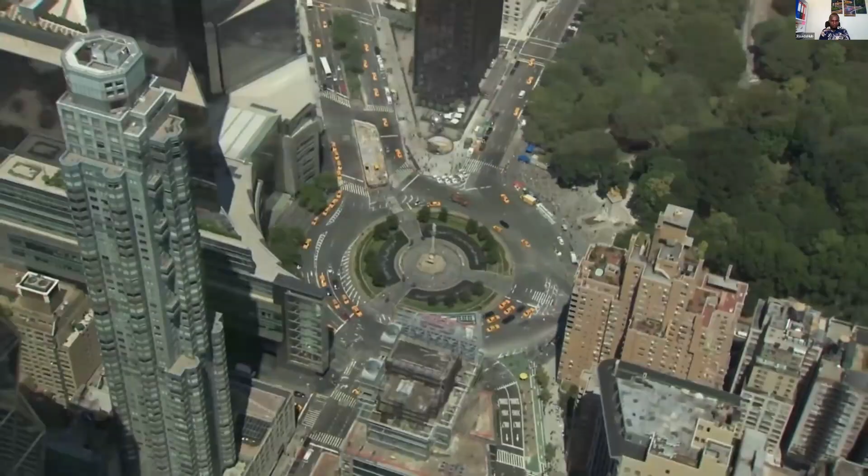Cities, those dense congregations of people and buildings, have made possible economies and lifestyles our early ancestors could never have imagined. Whether you thrive in or despise the concrete jungle, there's no denying its benefits. Putting all the people, houses, jobs, stores, offices, and diversions in one place gives us opportunities that wouldn't be possible if we all lived agrarian lifestyles spread across the countryside. But there are negative consequences from cramming so much into such a small area, most clear when it rains. Managing the flow of runoff through a city is an immensely complex challenge affecting public safety, property rights, the environment, and the health and welfare of citizens.

Hey, I'm Grady, and this is Practical Engineering. On today's episode, we're talking about urban stormwater management.

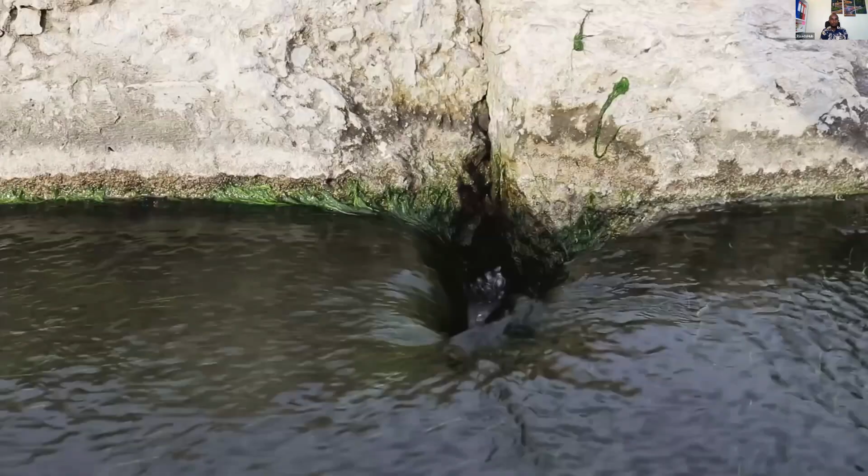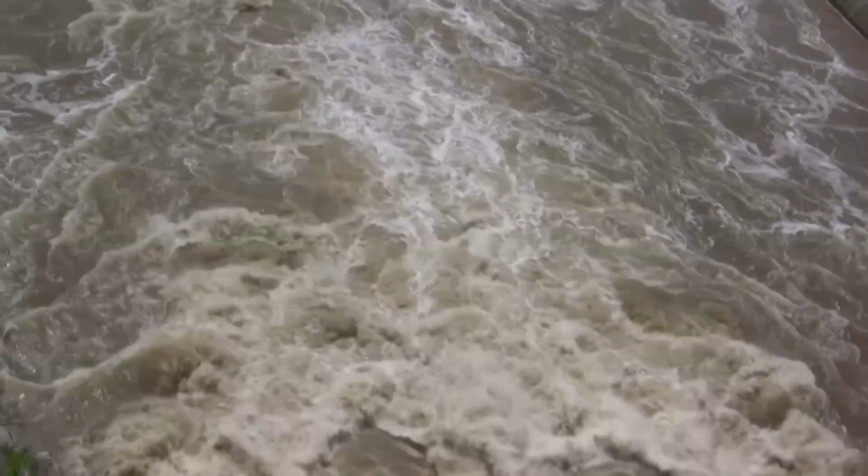The water cycle is one of the most basic science lessons we learn, so basic that it's easy to forget how relevant it is to our lives. Look out your window when it's raining, even raining hard, and it doesn't seem significant. Some rain soaks into the ground, some gets taken up by plants, some gets caught in puddles, and some runs off downhill, usually into the street. One of the biggest challenges in a city is the proportions of all these different paths water can take. Streets, sidewalks, buildings, and parking lots cover the ground with impervious surfaces, so instead of infiltrating, water runs off toward creeks and rivers, swelling them faster and higher and filling them with more pollution.

One of the biggest environmental impacts of building anything is its effect on how water moves above and below ground during storms. Multiply that to the scale of a city, and you see how remarkably we modify our landscape. Instead of acting like a sponge to absorb rainwater, urban watersheds act like funnels, gathering and concentrating runoff. In this video, I want to walk through some infrastructure cities use to manage this challenge and a few new ideas in stormwater management taking hold in urban areas. Like most big challenges of building a civilization, the negative impacts from adding impervious cover don't befall the property owner doing the adding, but rather the people downstream.

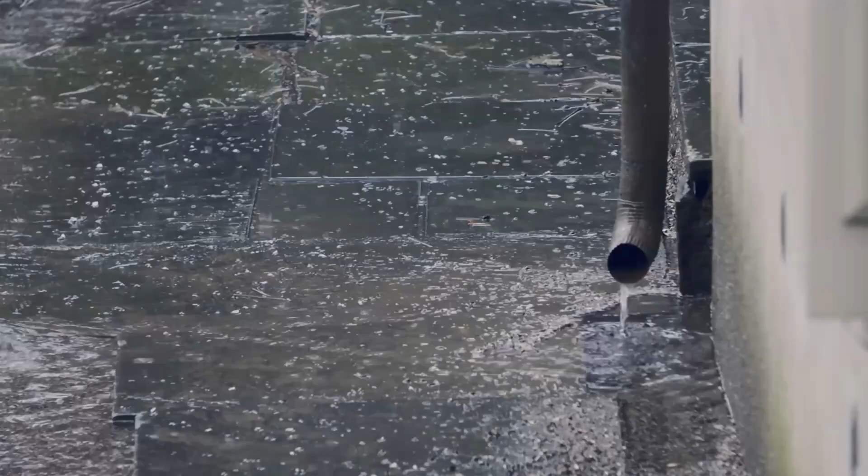Just like dumping pollution into the river carries it away to the next guy, it's easy to make bad drainage decisions into someone else's problem. That's why most large cities have rules about how to manage runoff and flooding when new buildings or neighborhoods get built. Drainage reviews are just a normal part of the process of obtaining a building permit these days. If you live in a major city, just do a search for your local drainage manual to see the kinds of things that are required.

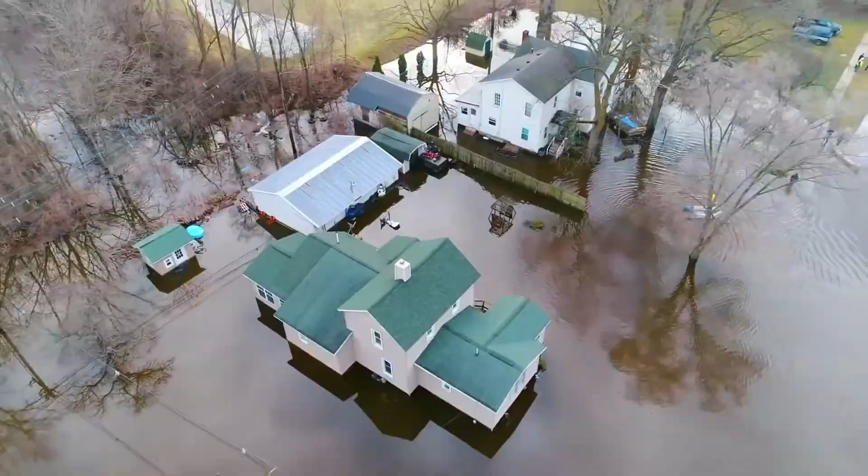Increased runoff has been a problem since people started living in cities in the first place, and the first way we handled it was simply to get the water out and away as quickly as possible. That's because runoff creates flooding, and flooding causes billions of dollars of property damage and many lives each year. This solution is in the name we still use for how cities manage storms: drainage.

When it rains or when it pours, we try to give that runoff somewhere to go. Most cities are organized so the streets serve as the first path of flow for rainfall. Individual lots are graded with a slope toward the street so that water flows away from buildings where it would otherwise cause problems. The standard city street has a crown in the center with gutters on either side for water to flow. This keeps the road mainly dry and safe for vehicle travel while providing a channel to convey runoff.

But the streets aren't the end of the line. Eventually the road will reach a natural low point and start back uphill, or will have collected so much runoff that it can't hold it all in the gutter. At this point, the water needs a dedicated system to carry it away.

In the past, it was common to simply put all the runoff from the streets directly into the sewage system. It's a well-developed network of pipes flowing by gravity out of the city. Why not use it for stormwater too? Well, there's actually a really good reason not to do that.

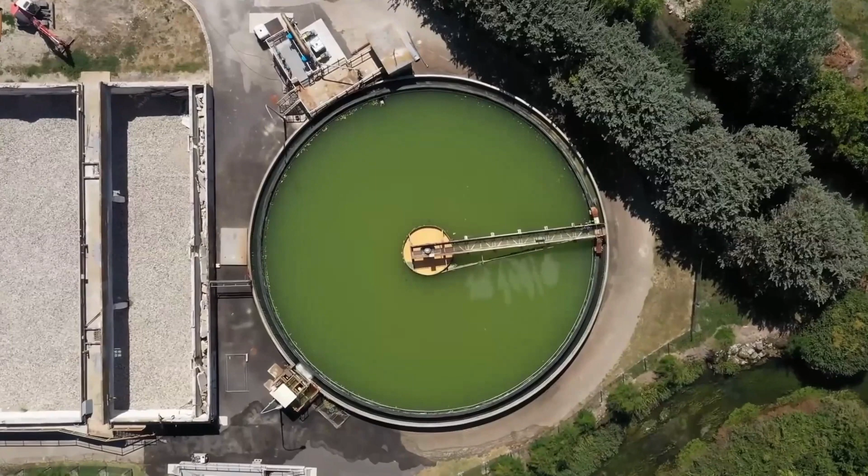At the end of each sanitary sewer system is a wastewater treatment plant that was almost certainly not designed to process a massive influx of combined sewage and stormwater runoff at the whims of Mother Nature. In the worst cases, these plants have to release untreated wastewater directly into waterways when it's too much to be stored or processed. That's why most cities now use municipal separate storm sewer systems, usually abbreviated as MS4s.

These are networks of ditches, curbs, gutters, sewer pipes, and outfalls solely dedicated to moving runoff from everywhere in the city to the natural waterways that eventually carry it away. These inlets aren't just places for clowns to hang out. They usually represent a direct path between the street and the nearest creek or river. Just to be clear, there's not usually any type of treatment happening along the way.

These sewers are not for waste. Whatever you put in the storm sewer system goes directly into a waterway, so please don't dump stuff in there.

It's easy to see why cities try so hard to get stormwater out as fast as possible if you look at the floodplain. This is just the area most likely to be inundated during a major flood. Land is one of the most valuable things within a city, but its value goes way down if it's exposed to flood risk. No one wants to build something on land that could be flooded. That being said, humans are notoriously bad at assessing risk, and no matter where you look, you're likely to find development near creeks and rivers.

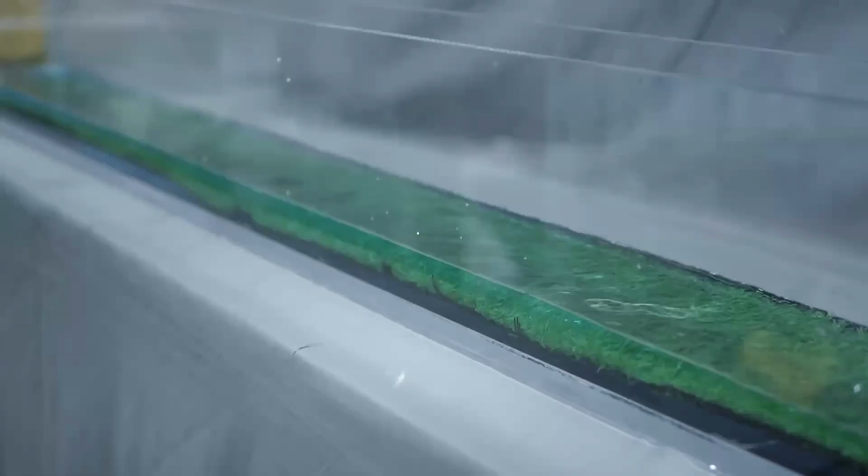Getting the water out quickly reduces the depth of flooding and thus shrinks the floodplain. That's a big reason why you see natural waterways in cities enlarged, straightened, and lined with concrete. You can see in my demo, for the same amount of flow, the channel with lots of vegetation moves water more slowly and thus at a higher depth. The channel with smooth sides gets the water moving faster and thus reduces the depth of flooding.

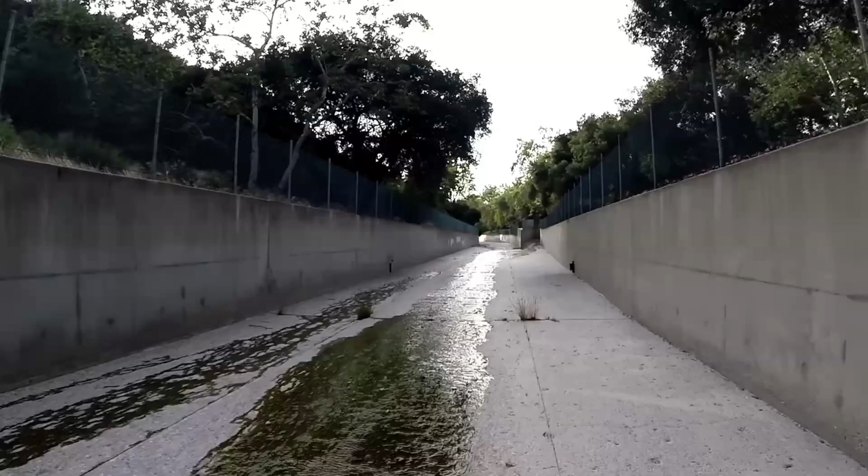But channelization isn't all it's cut out to be. It's ugly for one. No one wants a big dirty concrete channel as part of their surroundings. But channelization also worsens flooding downstream for the next guy and degrades the habitat of the original waterway. It didn't take long for cities to realize you can't just keep widening and lining channels to keep up with the increased runoff from more and more development.

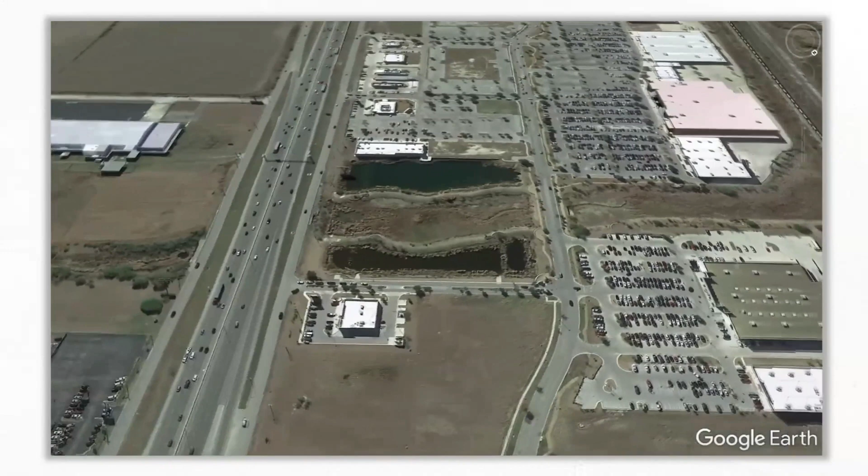That's why most cities now require developers to take responsibility for their own increase in runoff. By and large, that means on-site storage for stormwater. Retention and detention ponds act like mini sponges, absorbing all the rain that rushes off buildings, streets, and parking lots, and releasing it slowly back into waterways. This shaves off the peak of the runoff with the goal of reducing it back down to or less than it was before all those buildings and parking lots got built. They also help reduce pollution by slowing down the water so suspended particles can settle out.

On-site storage is a pretty effective solution, and one you'll see everywhere if you're paying attention, but it still treats stormwater as a waste product, something to be gotten rid of. The reality is that rain is a resource, and natural watersheds do a lot more than just get rid of it. They serve as habitat for wildlife, they naturally clean runoff with vegetation, they divert rain into the ground to recharge aquifers, and they reduce flooding by slowing down the water at the source rather than letting it quickly wash away and concentrate.

That's why many cities are moving toward ways to replicate and recreate natural watershed functions within developed areas. In the US, this is called low-impact development, and it includes strategies like rain gardens, vegetated rooftops, rain barrels, and other ways to bring more harmony between the built environment and its original hydrologic and ecological functions. It can also include better management of the floodplain by using it for purposes less vulnerable to flooding, like parks and trails. One low-impact strategy is permeable pavement, and I have a video just on that topic if you want to check it out after this one.

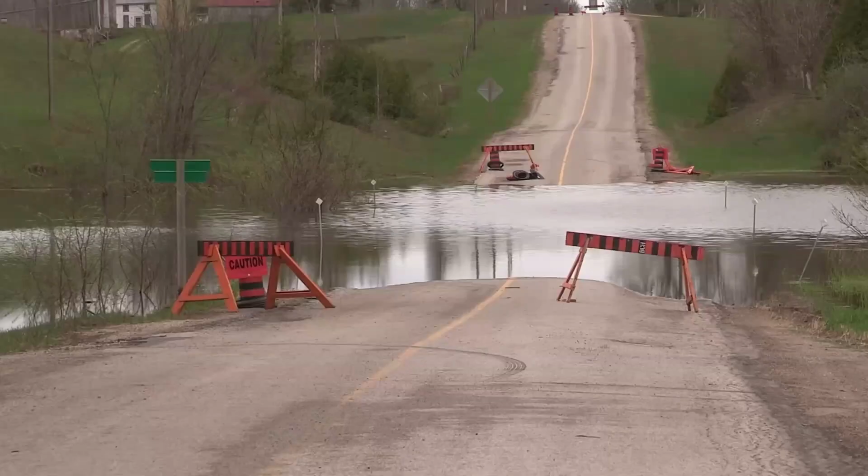One thing I have to mention when talking about flooding is vehicle crossings. Any location where a waterway and a road cross paths, whether it's a bridge, a culvert, or a low water crossing, there's always a chance of flooding getting so bad that it overtops the road. If you ever see water over the top of a roadway, just turn around. Half of all flood-related deaths happen when someone tries to drive a car or truck through water over a road. If you can't see the road, you have no idea how deep the water is.

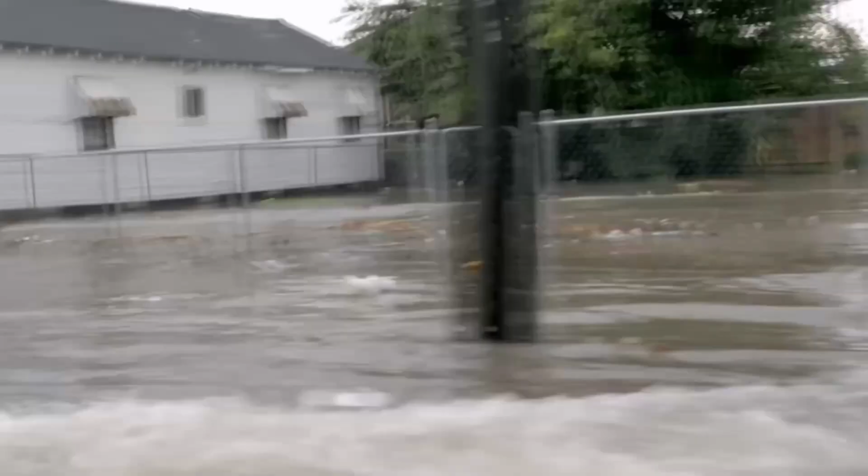Even if you can see it, it only takes a small amount of swift water to push a vehicle down into a river or creek. Water is heavy. Even when it's flowing slowly, floodwaters can impart a massive force on a vehicle. Even if it didn't, most cars will float once the water reaches the floorboard anyway. Some cities have warning systems to help block roads when they're overtopped by floods, but it's not something you should count on. It just isn't worth the risk. Find another way. As they say, turn around, don't drown.

Just like cities represent a colossal alteration of the landscape and thus the natural water cycle, we're also going through a colossal shift in how we think about rainfall and stormwater, and how we value the processes of natural watersheds. Look carefully as you travel through your city and you'll notice all the different pieces and parts of infrastructure that help manage water during storm events. You'll see plenty of ways to get water out and away from buildings and streets, but hopefully you'll also notice elements of low-impact design, ways of harnessing and benefiting from stormwater on site, treating it like the resource that it truly is.

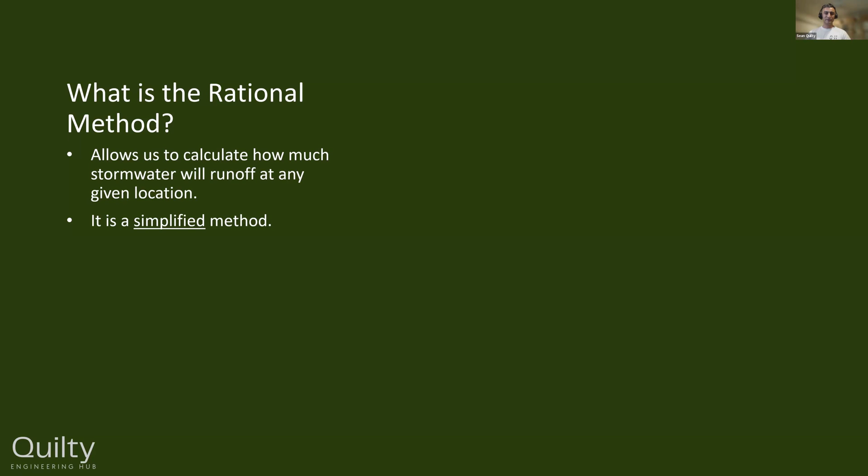Essentially, the rational method allows you to take a location of interest and analyze that site using contours and topographical information to find the catchment. Then the rational method calculates how much stormwater will run down to your point of interest. We can use it in rural areas and in built up urban areas. For example, we can have a point of interest at the end of a road, and analyze that catchment to work out how much water will run through at that location.

The three variables we look at are rainfall intensity, catchment area, and the catchment response to runoff, or the coefficient of runoff. Those three things are all we need to get an estimate of the worst or highest peak discharge rate of any catchment.

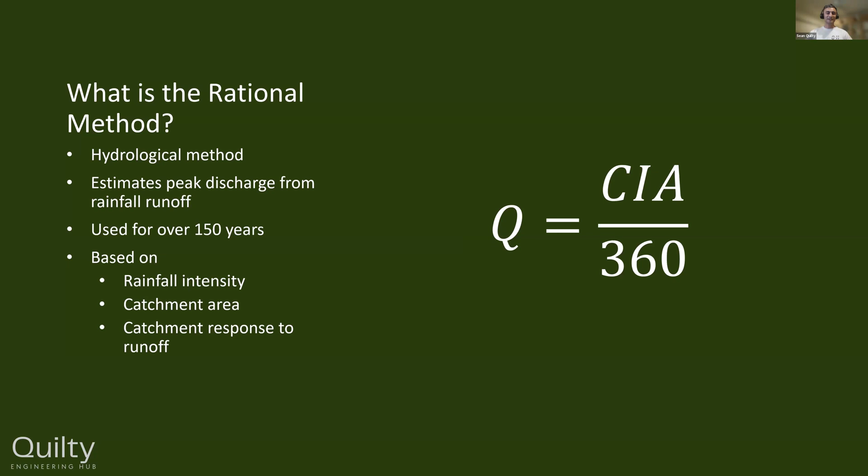The rational method relies on two assumptions, and we really need to understand these because we're trying to simplify something very complex. Rainfall, catchment response, and stormwater flows are very complicated, with lots of variables, and it becomes very complex if we want to try to mimic exactly how it works.

So we assume two things. First, we assume that a storm burst of duration equal to the time of concentration will yield the maximum or peak discharge rate. So if our time of concentration is 20 minutes, we assume that a 20-minute storm burst will give us the peak or worst discharge rate.

That's one assumption we make, and it's not always true, but that's what we use for the rational method. The second assumption is that the watershed or catchment receives uniform rainfall during this time of concentration - also not true. People will appreciate that during a storm burst, the intensity of rainfall will fluctuate over time, but the rational method assumes it's uniform during that time of concentration. With those two assumptions, we can then proceed using the rational method.

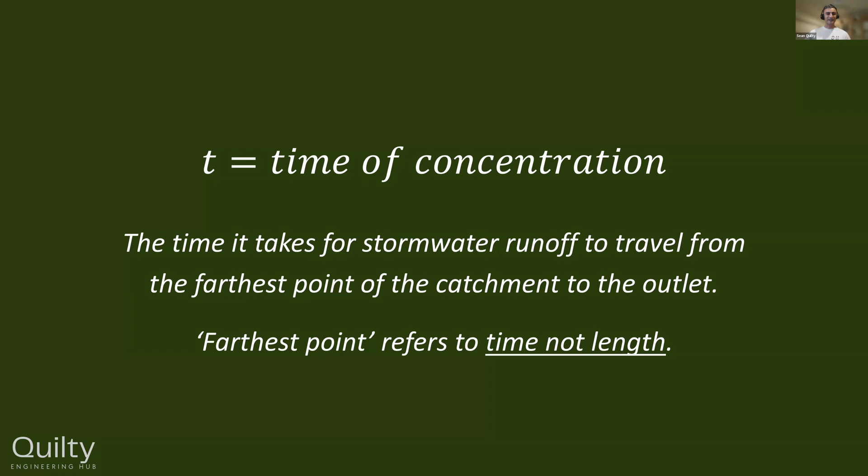With the time of concentration, there are various components relating to the catchment conditions. Essentially what we're looking at is flow paths—how stormwater runoff is running through your catchment. That will depend on the type of surface we have, the grade, the treatment or surface finish. Is it grass? Is it concrete? Is it a forested area? All of these things will change how the water flows through your catchment.

We look at the overall total flow path from the top of your catchment to the bottom, and we can break it up into different flow components. If we add up those components, we get our total flow path, which allows us to calculate our total time of concentration.

These are probably the most common flow path components, or time of concentration components, if you like—certainly the most common that we use here in Australia in urban areas, and I'm sure probably the rest of the world as well. We won't have time to go through those in detail, but just to give you an idea, we look at roof to main system connection.

That just means how long does it take the rainfall to hit our roof and then start spilling out onto the road, perhaps through a kerb adapter or an opening where our downpipes will discharge onto the roadway. So that's one component of a flow path, and it would have a certain time.

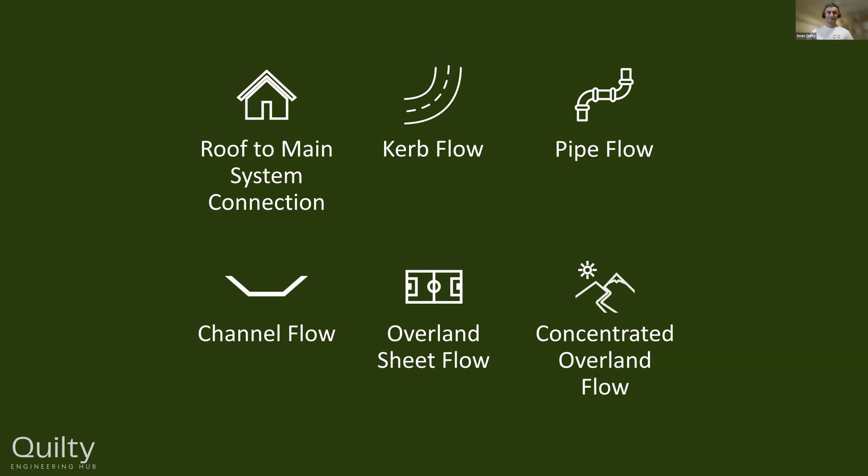So we'll look at our formula: Q equals CIA on 360. Now we're just going to break down each of those variables.

So first we look at the coefficient of runoff. The coefficient of runoff is the ratio of total runoff to total rainfall. If your coefficient of runoff was 1, it means all of the rain that falls from the sky and hits your catchment will end up at the bottom of your catchment. This accounts for catchment infiltration and other runoff losses.

We know in reality, when water hits our catchment, it will be trapped or stored in small depressions, it might infiltrate into the ground in pervious areas, and it could be lost through trees, in evapotranspiration and a few other ways. This coefficient of runoff helps us quantify that phenomenon, where the water doesn't actually make its way to the bottom of the catchment.

If we have a low C value, that tends to reflect pervious areas. As an example, if we had a C value of 0.5, we're basically saying that 50% of our rainfall will result in runoff, and the other 50% will be lost in the catchment. That's why with pervious areas, we tend to have more water stored or trapped in the catchment - it filters into the ground, the soil, the grass, the trees - so our C value is less, and there's less runoff at the bottom of our catchment.

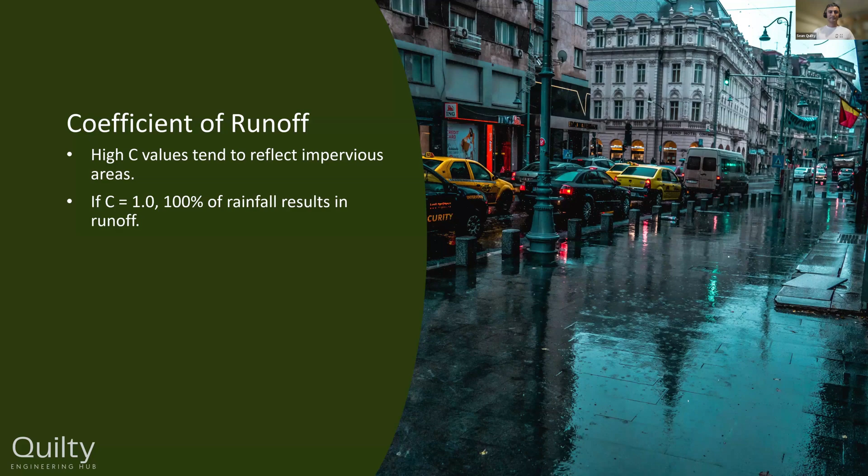So now we get to rainfall intensity, our second variable of the rational method. When we talk about rainfall intensity, this is when we look at the rain, or the rate of precipitation, falling over a certain period of time. It's expressed as millimeters per hour for the rational method.

Here in Australia, we have a resource where we can obtain IFD data, or rainfall intensity data, for anywhere in Australia. We can also choose to obtain the rainfall intensity as a depth over whatever that storm duration is. I point that out because when you start doing rational method calculations, you want to make sure you're using millimeters per hour in your equations. Sometimes I've seen people use millimeters instead of millimeters per hour, and you get drastically different results, so just keep an eye on that.

Now, if we want to obtain our rainfall intensity, we need our time of concentration, which is catchment specific, and then we need a storm frequency - how frequent are these storms likely to occur? From that, we can then obtain an IFD table and read some values from it.

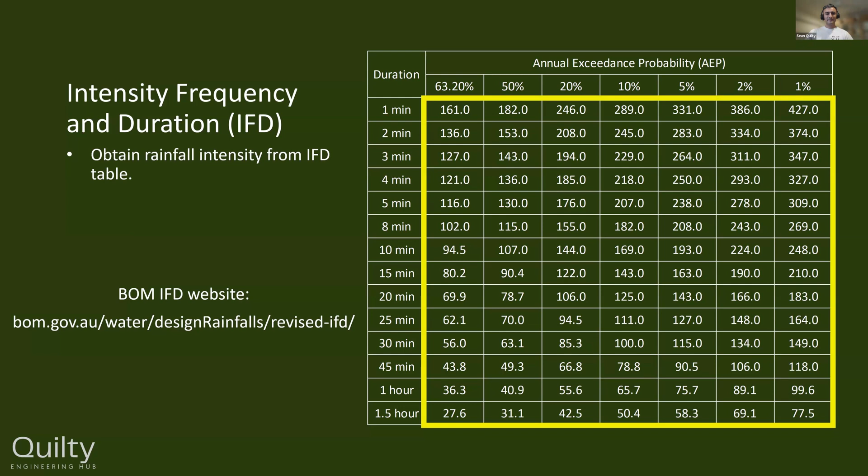So there's some trends that you will see in the IFD tables, and I think it's really important to appreciate this, because when you're doing calculations, if you know these trends or what's likely to happen, you can usually spot your mistake if you get a different answer, because it won't make sense.

As an example, when you're looking at rainfall intensity, the intensity will increase as the storm frequency decreases. So the storm frequency, if we start on the left, we have a 63% chance of that storm occurring any year, so it's a frequent storm that happens very often, and that rainfall intensity is relatively low. If we look at a 1% storm, which is a very major and rare storm, you can see the intensity will increase significantly. So rainfall intensity increases as the storm frequency decreases, as the storm becomes more rare.

When we look at storm duration, the rainfall intensity will decrease as the storm duration increases. If you have a very short storm, it's usually very intense and severe, so you have a very high rainfall intensity. So the 1, 2, 5 minute storms, you can see the intensity is very high. As that storm duration gets longer - a 1 hour storm, a 1 day storm, a 1 week storm where it just sort of drizzles for a week - you can see the intensity will decrease as your duration increases.

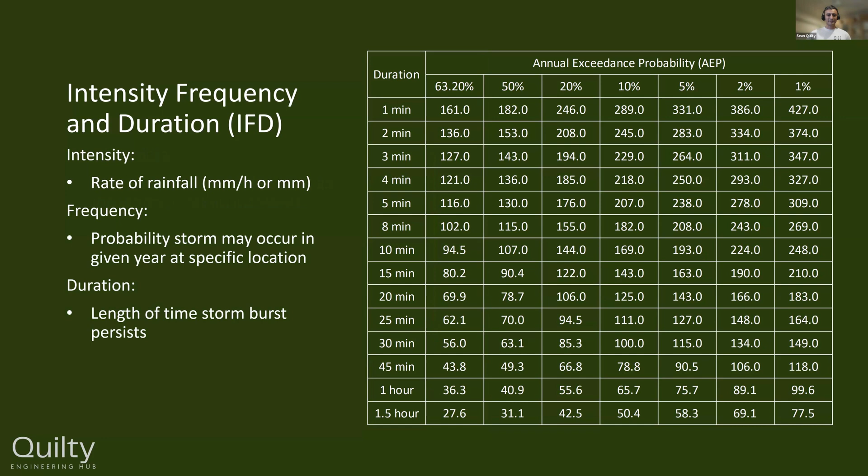So now we look at the catchment area. It can be determined by a series of different ways of finding this information, and I always encourage people to get as much information as possible and not just rely on one source. What I mean is your catchment could be determined using contours, it could be using council records, aerial imagery can also help sometimes too, and I think one of the most important are site inspections.

So even though you might have a contour map, it's always good to go out on site and actually walk the site and see what that catchment might do. You never know what might have happened since the original contours were picked up or surveyed, and what's actually happening the day you start designing. So with all this information, we can bring it together and start to understand our catchment.

So to identify a catchment, we need a point of interest. This can be any point, but you've got to remember when we do the rational method, whenever you calculate a peak discharge rate or Q value, it's always specific to a certain location, and that will have a specific catchment. So this point of interest might be a gully pit. If we're looking at inlet design, you might be analyzing how much stormwater runoff will be at the bottom of a hill, along a property boundary.

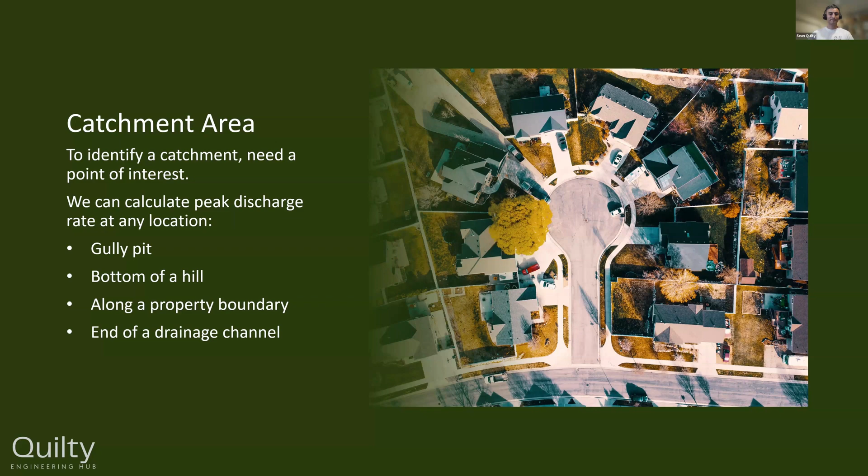All right, go back to that one. So then we come to the peak discharge. We have our C, I, and A variables, so now we can calculate our peak discharge, which is our Q value that we look at.

So the peak discharge is the maximum rate of stormwater runoff at a specific location during a rainfall event. When we know the maximum flow rate expected, we can calculate our runoff for our catchments, but we can do so much more than that. We can look at inlets and pipe systems and start designing them, calculate drainage channel capacities, look at road capacity and see what type of storm would actually cause flooding, whether it's safe controlled flooding or something more hazardous. We can look at flooded widths and flooded depths and understand how that flood is going to impact our community and our area, and we can also understand and calculate freeboard to buildings as well.

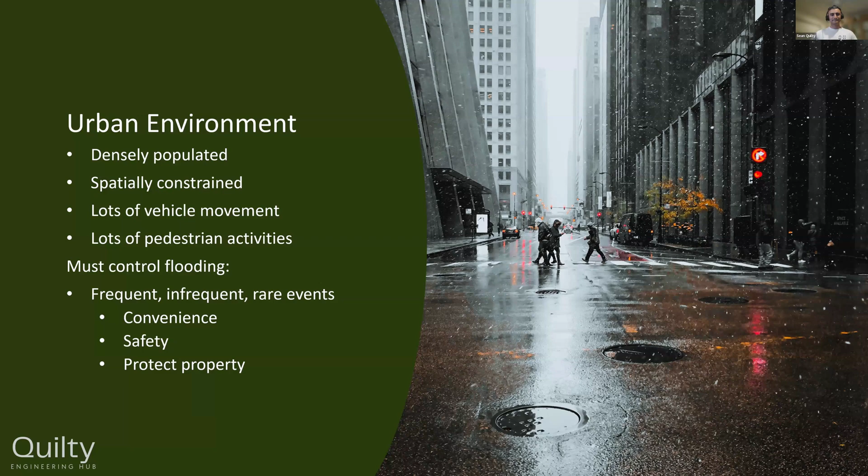So when we look at trying to manage the stormwater in an urban area, this is where we use longitudinal drainage, or another more common term, pit and pipe drainage. This is a combination of stormwater inlets and interconnected pipes. We use this as a gravity system to freely drain all of our stormwater runoff, so we make sure that when the water enters our system, it is freely draining through gravity to discharge.

Now, the majority of Australian systems discharge into creeks, rivers, or the ocean. There are some inland lakes, but the majority of our population lives on the coastal fringes of Australia. So almost every drop of water that drops in our cities will eventually make its way to the ocean.

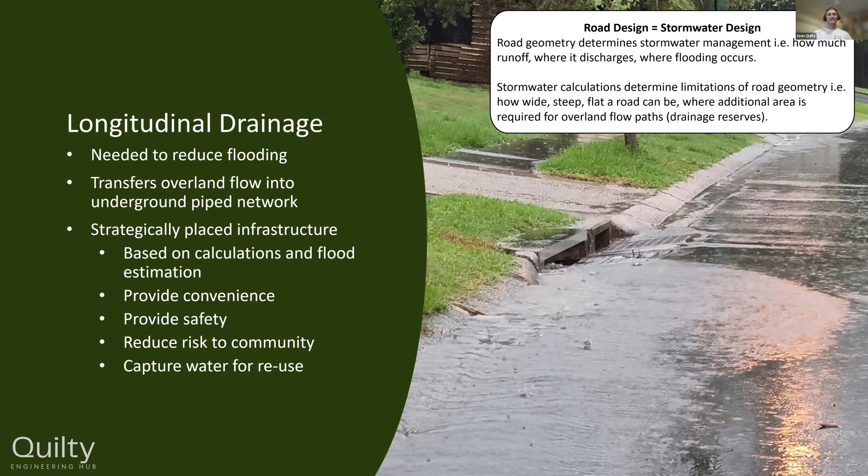When we look at stormwater inlets, there are two broad classifications we look at. Your stormwater inlet might be a sag inlet or an on-grade inlet. A sag inlet is when the inlet is positioned in the sag, the lowest point of the road, so you get stormwater runoff entering from both sides of that inlet. An on-grade inlet is when water approaches from only one side, the upstream end of the inlet, because that stormwater inlet is on a grade, on a fall itself, so the water runs towards the inlet.

There are many different names for these inlets. We call them inlets, we call them pits, we also call them gully pits. We have other types of inlets called field inlets, which can also be named drop inlets. And then we have kerb openings or side entry pits. All these names mean pretty much the same thing - a structure that is trying to capture and convey stormwater runoff from the surface and push it into our underground pipe system.

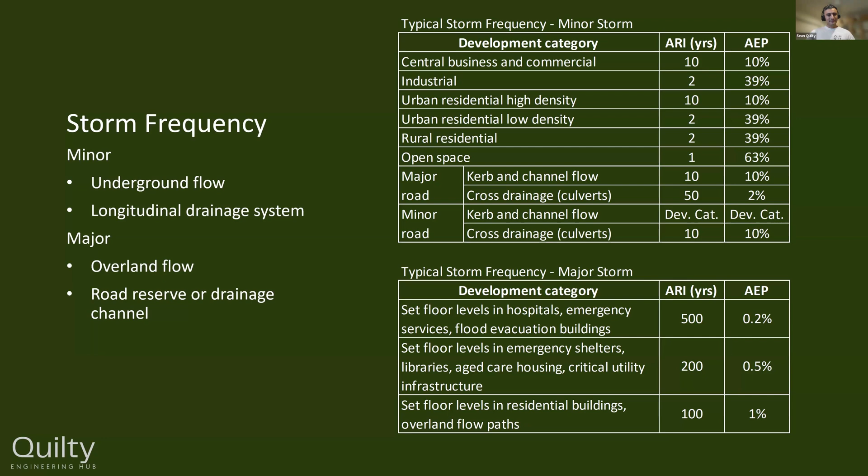When we look at kerb inlets in Australia, we have different inlets depending on what part of Australia we're looking at. The environmental conditions and the rainfall, just the way it rains, is very different in a large continent like Australia, and obviously a continent like Africa - a lot of the audience would appreciate this too. At the north end of Australia, we have very high rainfall intensity, very severe storms that drop a lot of rain very quickly. When we get to the bottom of Australia, it's the exact opposite - the storm events are very long duration, but the rainfall intensity is very light, very long days, weeks of rain at a light intensity.

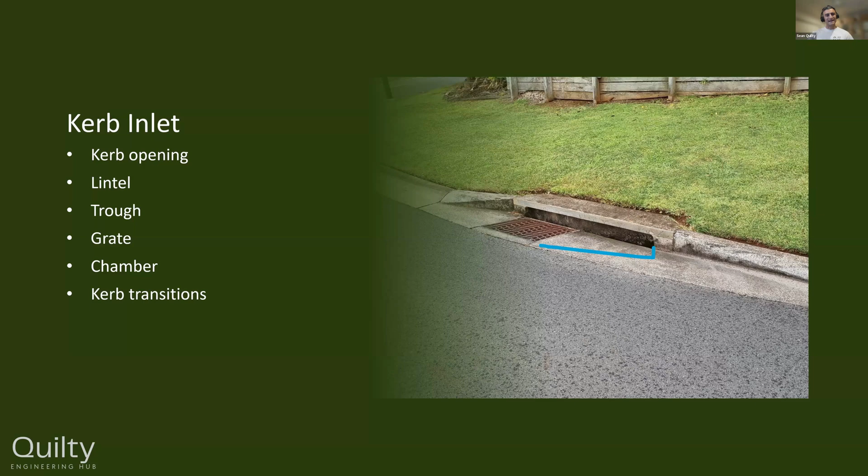To look a little deeper into the terminology and elements: we have the kerb opening itself, a lintel, which is a prefabricated structure that supports that kerb opening. That kerb opening drops into a trough hidden behind the concrete, which is a channel that grades towards the chamber. We have the grate itself that drops into our chamber and then connects into our piped system.

We also have kerb transitions. Typically we'd construct the kerb leading up to our gully pits once the gully pit was already installed, and then we have little breaks between the kerbs where we'd hand form that concrete to have a nice smooth transition from our kerb to our inlet.

We have field inlets. The previous ones were what we call gully pits. Field inlets, as the name suggests, are usually placed in open fields—parks, sports fields, grassy areas. Now we have three different types of grates.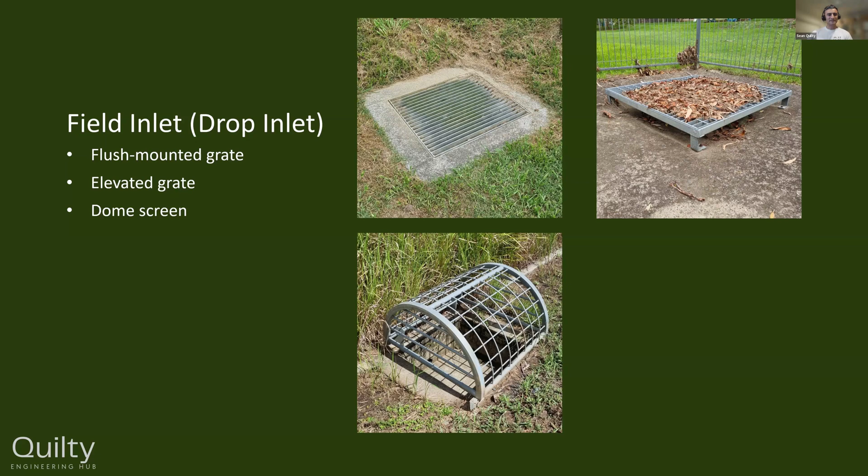One thing I like to point out when looking at any of these inlets is that we need to maintain them. That top right picture was after a storm that I went to check out. I'm a bit weird like this—when it rains, I like to jump outside and look at all the rainfall and see how these pits work. A lot of people like to stay inside, but I do the opposite. Anyway, it was a reasonably frequent storm.

I'd say it was probably a 63% type storm, one you'd typically see once a year, so it wasn't that bad. But after a couple of days, I went back, and you could see all this leaf litter resting on top of the pit, on top of the grate. The problem is, if we don't maintain these and leave all that debris there, the next storm that comes through, that inlet won't be working to its full capacity because it's already blocked full of leaves and debris. If that happens after a few storms, the inlet becomes almost useless, which can cause all sorts of flooding issues.

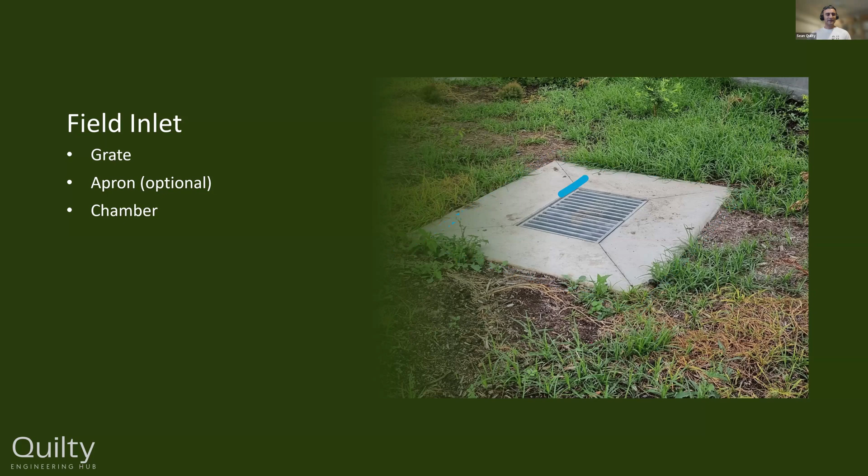With our field inlets, they're a little simpler. We basically have our grate, and we can have an optional concrete apron—just a concrete surround. Typically that's used to control scour, so the water doesn't scour and erode the soil around the inlet. It also helps with maintenance, because there's less chance that grass and vegetation will grow over and start blocking that grate. Then that drops into our chamber.

That's the main terminology, and hopefully you can find some similarities there with the systems that you use.

Now we're going to look at flow limits. Before we calculate how much runoff our inlet will capture, we must assess the approaching flow heading towards our inlet. This ensures there's a safe flow width, that the flow isn't too wide, and that there's a safe flow depth. To assess how hazardous an approach flow might be, we use the product of depth multiplied by velocity, which gives us a good understanding of how much momentum is pushing through in that approach flow.

If we keep that depth-velocity product below a certain threshold, we tend to warrant that as safe flooding or safe approach flow. Anything beyond that threshold becomes unsafe, and then we adjust our road design or stormwater inlet location to bring that level down.

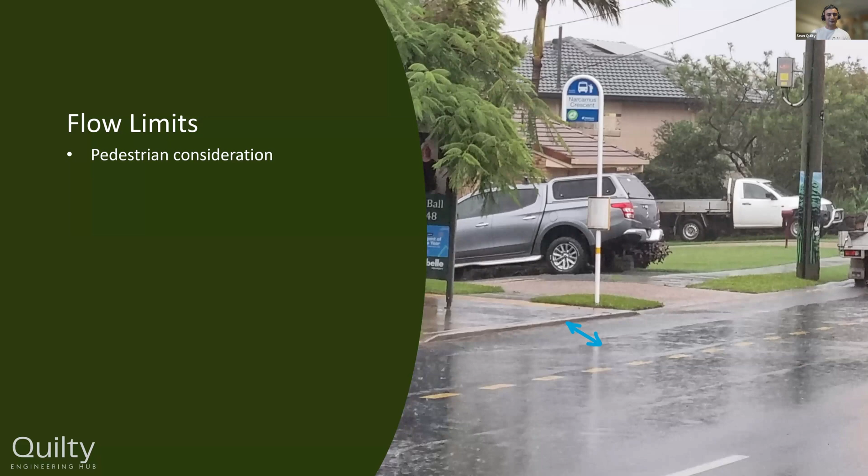When we're looking at road design, we are always assessing how much capacity a road has, and it's very important. So in one of our courses, we've got a design spreadsheet that allows you to enter your road geometry, the crossfall, the width, the curb type, and it will give you a table of the capacity of that road for any given grade.

That allows you to pick any particular road you might have, whether an existing road or one you're designing. Then you can see, depending on the grade of the road, you can read across and work out where your safe flows are and where they're not.

So that looks at the capacity a road has, or how much stormwater runoff a road can convey before it becomes unsafe. Again, all the values that we enter in there, you can change. So these can be used for any country all around the world - you just tweak those values.

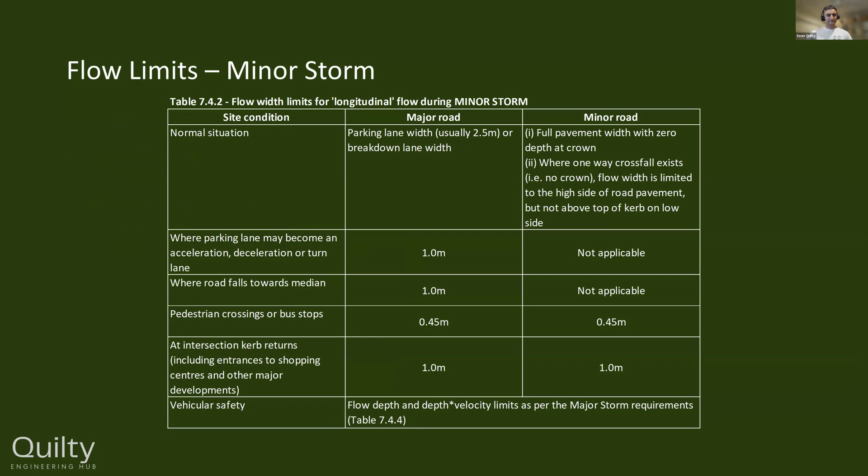Now, I talked about the depth velocity product. That's a value or threshold that we use. As an example, a depth velocity product, if you had water running across a road, say it was a floodway, and vehicles needed to drive through safely, we have a depth velocity product less than or equal to 0.3, and that's our threshold. If we take our flooded depth multiplied by velocity and it's more than that 0.3, we know that's becoming hazardous and we deem that to be unacceptable.

So it's a great way to check for those design requirements. Again, I won't run through all of these, but they do have some different depth velocity products as well. This time it's not water running across the road, but water running parallel to your road through your curbs. You can have a depth velocity product of 0.6 or 0.4, depending on certain requirements.

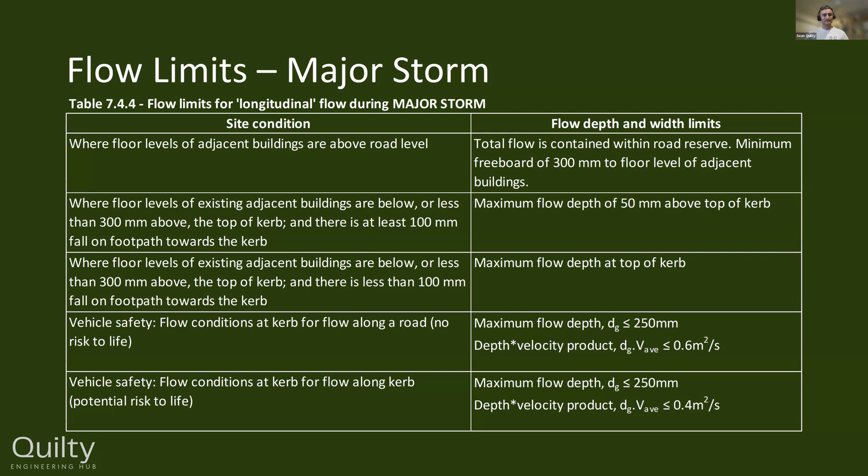All right, so we understand the terminology. We know the types of pits that we might have. We also looked at the flooded widths, so what's deemed to be appropriate or not appropriate, and that's how we find those values. So now we can understand the flow terminology.

When we're looking at the catchment, what do we call these different flows? This is where we have catchment flow, or I call it QC lowercase c, approach flow QA, inflow QI, and bypass flow QB.

Before we jump into exactly what those values are, the first thing we need to do is understand our catchments. We mentioned this in the rational method course previously. So we can obtain contours, site visits, survey information to really understand what's happening in the catchment. Once we understand how the land is graded, the topography, we can then understand how our roads are going to behave when it comes to stormwater.

So we can understand our road falls, and where we have a road that is on grade, we know straight away that we need on-grade pits. If we have our road and find that there's sag locations, we know that we need to have a sag inlet at those sag locations.

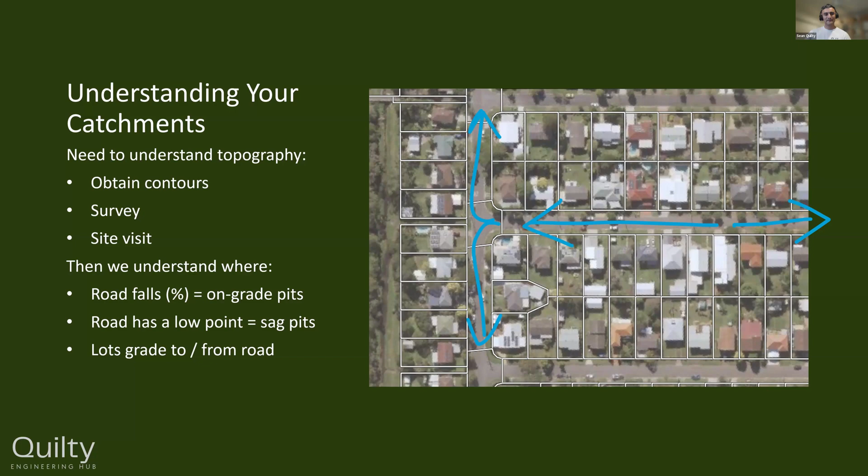We can also understand how our lots are grading as well. So this is a residential development, but it could be an inner city area, or a rural residential area. But when we have the topography, we can understand how those lots will be grading.

In a similar manner, if this was a proposed development, this is how you could also start designing your development, designing your road geometry, and also designing your lot grading. Where would you like these lots to fall? And that's where we start getting into earthworks modeling, designing, retaining wall placement, and all sorts of fun stuff as well.

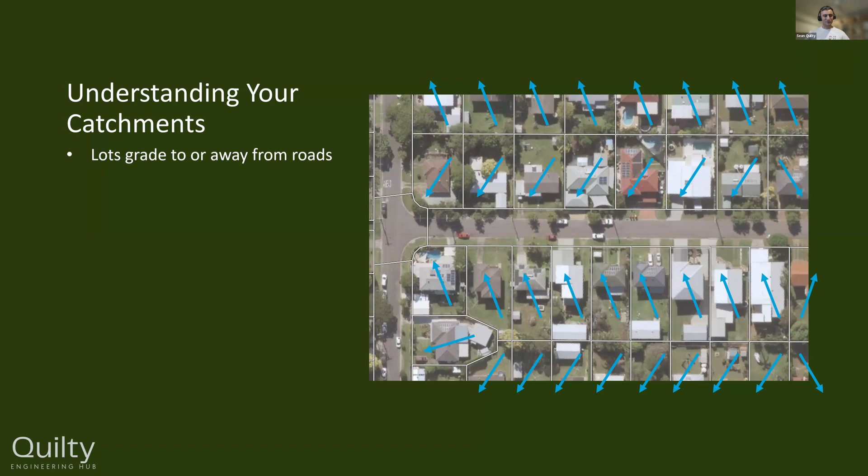So we know that when we have our road crest, it's going to push water in opposite directions, which makes it very easy to understand how this water will behave.

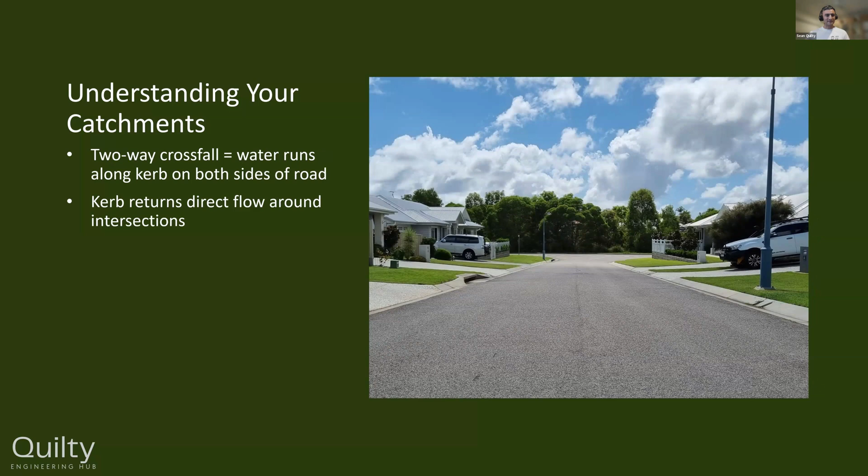We also need to understand how our road geometry or cross-sectional profile looks as well. This might be existing roads that we're assessing, or proposed roads that we're going to design. As an example, if we have a crowned road with a two-way crossfall, we can start to understand where these flows are going.

And how they're going to behave. In a similar way, we can look at our kerb returns. So at intersections, if we understand where our roads are grading, we can then start to understand how that intersection flow or stormwater flow will behave at the intersections.

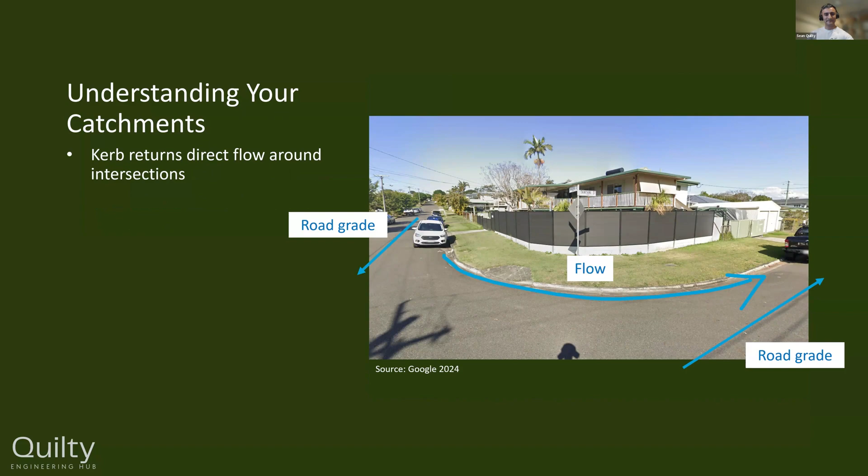So now we come to the flow terminology. The first thing that we look at is catchment flow. The catchment flow is the flow that's approaching our inlet. When we talk about catchment flow, it's only the catchment for that particular inlet pit. And then we use the rational method to calculate what this flow is, what this peak discharge rate is.

So as an example, if we had some stormwater inlets in our pipe system, let's look at this individual stormwater inlet. Remember, when we spoke about the rational method, when we're calculating a peak discharge rate or a Q value, it's always to do with a specific location first. So this inlet is going to be our specific location or our point of interest.

So knowing that point of interest and understanding how our catchment behaves, we can work out what that catchment is. That is what we would call the catchment flow, the flow rate that's coming off of that.

We do the same thing for the inlet on the other side of the road, assuming this is a two-way crossfall road. We can then calculate what that catchment is, work out the area and also the rational method peak discharge rate.

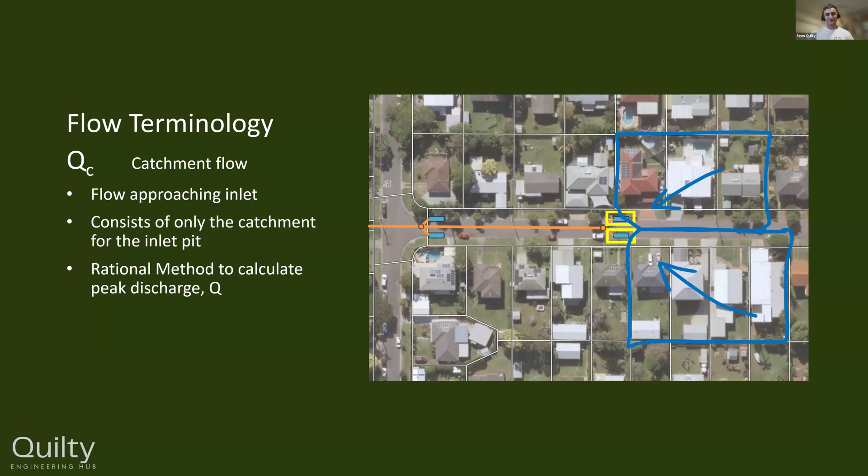Now that we know our catchment flow running towards our inlet, we can start to understand inflow. This is the total flow that the inlet will capture and convey underground into our pipe network. Now, when we look at inflow, we need inlet capture charts to calculate these.

So this will be your flooded width heading from upstream of the road, heading down towards your inlet. This is what we call approach flow. So we looked at catchment flow, and next we're going to talk about approach flow. Now that approach flow...

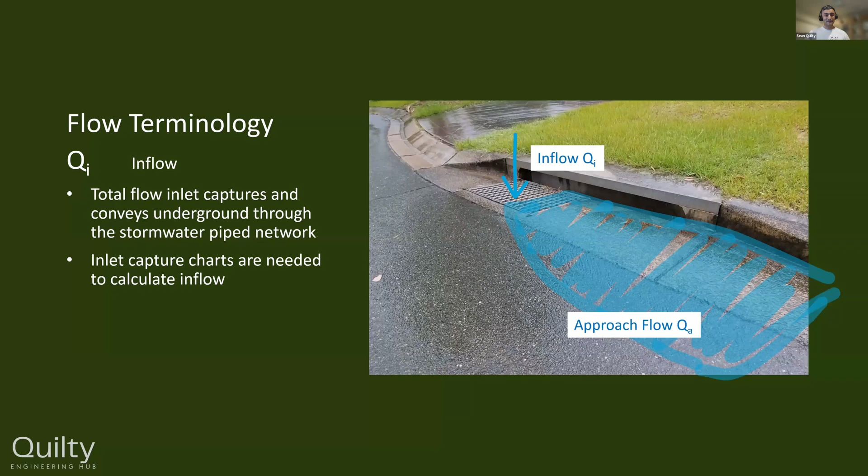will drop into the inlet, but that inlet will have inflow, and that will be limited. It won't capture everything that approaches. There will be a threshold. Now, once it captures as much as it can in the inlet, sometimes there is excess flow that is not captured, and that actually heads down as bypass flow. So a small amount of flow might head downstream.

So this is what we call bypass flow, the remaining flow that is not captured by our inlet. And we can calculate the bypass flow by taking our approach flow minus our inflow, so the remaining is our bypass flow. Now, that bypass flow causes an issue because the inlet downstream, we would have done our catchment. So we'd have a catchment flow, but then all of a sudden we're adding this bypass flow as well.

So this is where we look at approach flow. If our inlet is at the top of the catchment and there's no inlet further upstream, we're right at the top of the catchment, our first inlet, we would look at the catchment, and that would be our catchment flow. Now, because it's at the top of the catchment, there is no bypass coming into this catchment. So our approach flow heading towards the inlet is equal to our catchment flow.

So what happens is that approach flow heads towards the inlet. We have inflow that is captured by the inlet. And then in this case, we've got bypass flow.

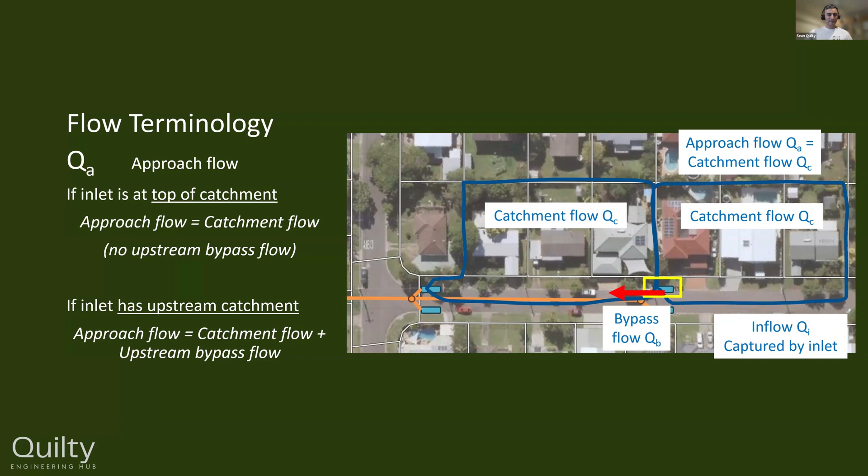So when it comes to the next inlet downstream, we do the same thing. We work out our catchment, we would work out a catchment flow, but then we have to add that extra bypass flow to work out our approach flow for that downstream inlet. So what you end up having is this cascading effect where you need to account for this bypass heading down to each of these inlets.

Now, I won't go into too much detail now, I know time's running out, but there are times that I've seen when checking people's works or designs where they will assume that the inlet just captures everything. Whether it's manual calculations or whether they've used computer software and haven't set it up correctly, the inlet just takes 100% of that approach flow. That is a very dangerous, very risky move, because that's not in reality what's actually going to happen. We need to make sure we assess and account for these bypass flows, because that is usually what causes major flooding issues.

Okay, so when we look at the inlets, we need to understand how much flow any of these inlets are actually going to capture. This is done in a couple ways. We can use mathematical equations that can estimate how much stormwater an inlet can capture, or we can use laboratory testing, which will then have proven results based on a real life-size scale model of what's happening.

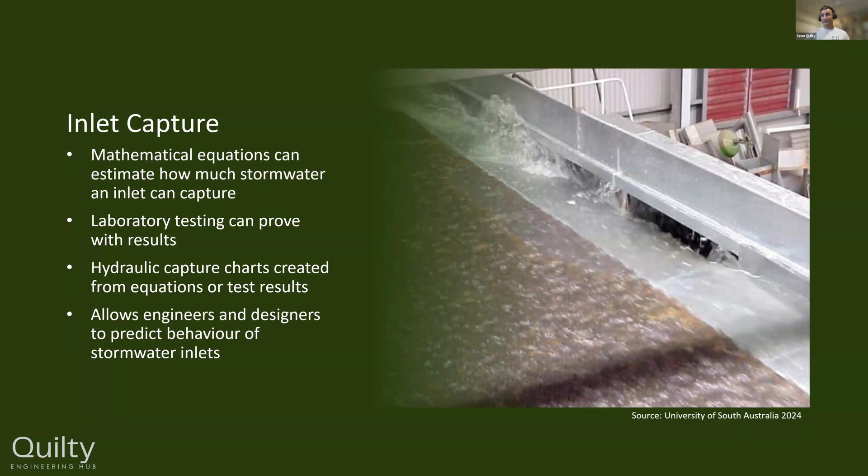Another point I like to make is you need to have an inlet chart for every different type of inlet. You cannot use the same chart if the inlet configuration is going to change. So if your kerb opening is deeper or wider, you can't use that same chart. If anyone is interested, reach out to me, but I can help people design and help them with the theory in creating these inlet charts if needed. And that goes across the world as well, not just Australia.

So when we look at the inlets, we need to understand the hydraulic performance of these inlets, how are they actually going to work. When we have inlets in a sag condition, the hydraulic performance is influenced by the ponding depth above the inlet opening. The water's coming from both sides into this sag, this low depression area, and that means that this inlet is really in a pond. The water doesn't go anywhere else, it just sits at this inlet and tries to force its way in. So that's where the ponding depth, or how deep that flooded water is going to sit above that inlet, that's what really drives the performance, and then obviously the physical dimensions of the inlet, the kerb opening and the grate opening as well.

So as the water approaches from either side, the more water that approaches, it will start to fill up, so you'll get deeper water sitting over that inlet. So the performance will change as that water depth increases. The deeper the water, the more water that inlet will capture.

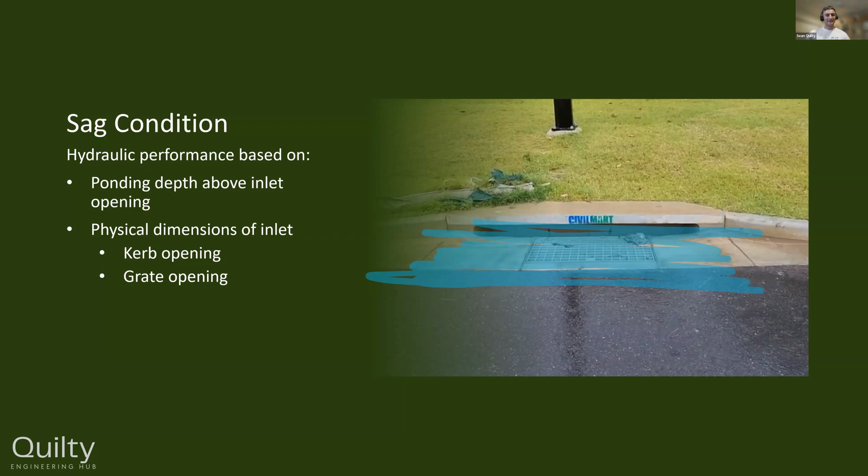It's very different when we look at on-grade pits as opposed to sag pits. For on-grade pits, the performance is based again on the physical dimensions of our inlet, so whether it has a grate, the size and type of grate, and also the kerb opening.

The other thing that comes into it is the road longitudinal grade and the road crossfall. The steeper the crossfall, the deeper the channel becomes between your curb and the road, so it will capture more water. The flatter the road longitudinal grade, the slower the water approaches, giving it more time to force its way into the inlet, so the flatter the road, the more water it will capture. A very steep road, and you'll start to get more bypass flow and less inflow.

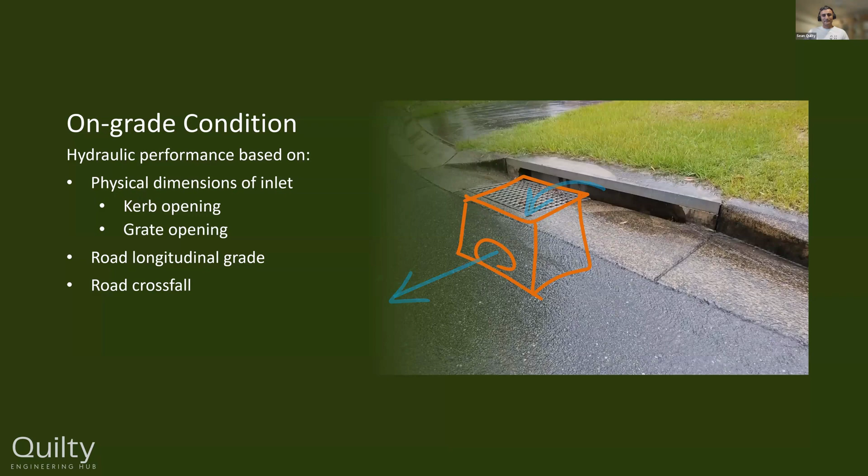Looking at our chamber here, this is where it gets a bit more tricky with on-grade inlets. We have our grate that will capture and discharge water out into our pipe there, and anything that isn't captured will obviously end up as bypass flow in that case.

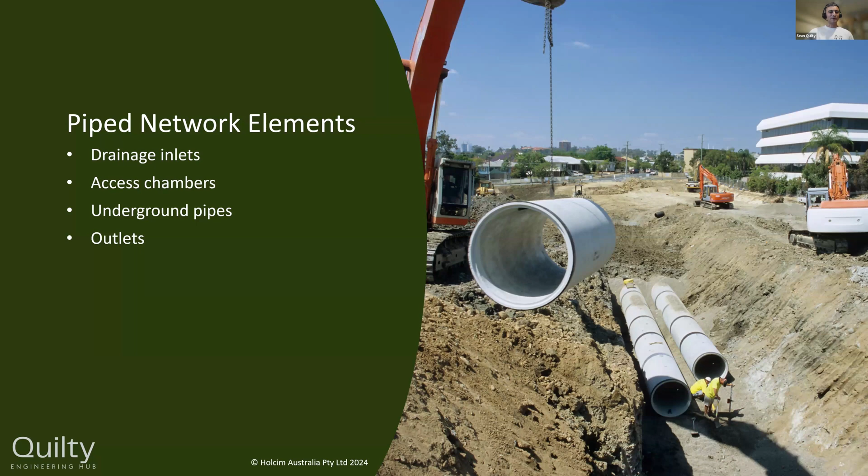Our drainage inlets, I think we're all pretty comfortable with now. We know these will capture our surface runoff, this controls our flooded limits - so that's our flooded width, flooded depth, and depth velocity product - and this redirects our flows underground into our pipe network.

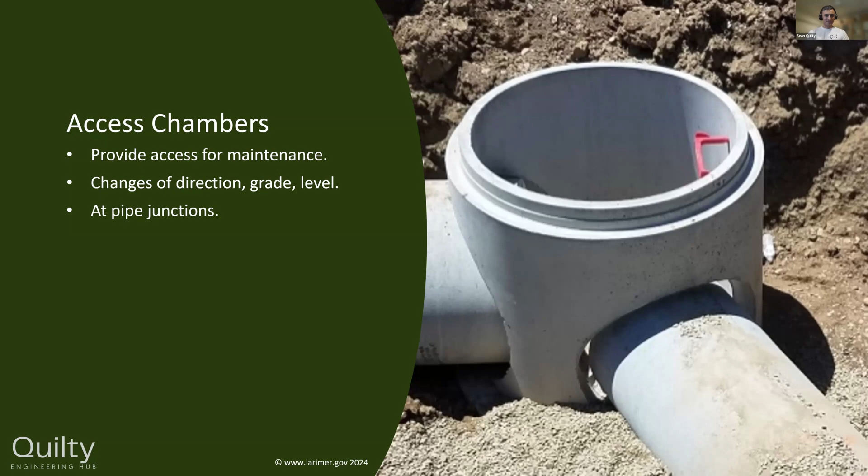We also have access chambers. As the name suggests, it provides access, and this is important for maintenance. When we have blockages or sediment buildup, another big problem with pipe systems, we can physically get in there and wash and clean out those blockages. Typically we have an access chamber at any change of direction - as your pipes change direction or angle, or change grade or level, we would have one of these access chambers here in Australia. Also at pipe junctions, we create these access chambers so water can enter into the chamber and then flow on the outlet.

Of course, we have pipes. This is what we use to convey our captured runoff from our inlets. Obviously multiple pipes interconnected within a system form our longitudinal drainage. They can be single reaches too - you could look at a pipe system where it might just be a simple culvert going across the road from an upstream to a downstream location.

Again, gravity systems, but this means these pipes need to discharge somewhere. That might be into a detention basin, into a bioretention system where we have a specific soil media that filters and cleans that water to allow it to discharge as cleaner, semi-treated water. We can discharge them into rainwater harvesting tanks. If we're doing a new development, we might have our stormwater pit and pipe system discharge into an existing pit, and of course we have our head wall outlets as well.

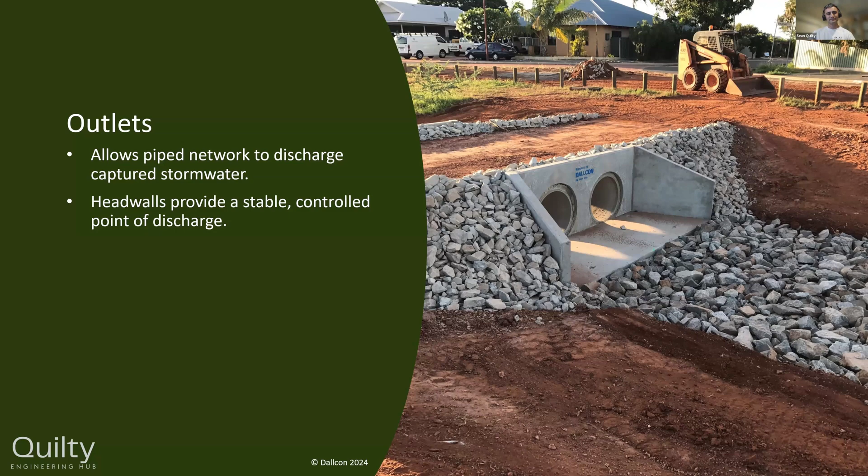Looking at the terminology now for pipe design, these are a few things we need to look at. First, we understand that the pit, which could be called a chamber or a structure, they all mean the same thing - it's a physical chamber in our pipe network. And obviously, our pipes.

We have our pipe length. From a design perspective, here in Australia anyway, we measure our pipe lengths for design based on the center of the chamber, from center to center. So it's not the physical pipe length for our design, it's actually a theoretical length that we use for design purposes.

We have our pipe cover, which is really important in our pipe design. That's the physical soil, earth, road pavement that you have above our pipes, and that protects and allows any loads from the surface to distribute evenly enough so the loads aren't too excessive, causing damage to our pipes.

We have our pipe slope, which I've got here as the letter SO, and I want to point out that you shouldn't confuse the pipe slope with friction slope. We don't have enough time to get into a heap of calculations, but when we look at the actual calculations of flow and hydraulic grade line, we start talking about friction slope, and that's very different, or can be very different, to your pipe slope. Just don't get those two confused.

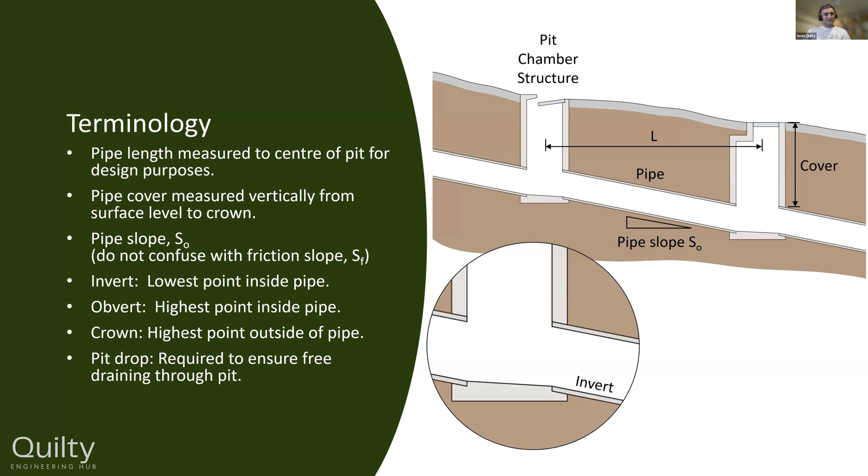Looking closer at our chamber, we have our invert, which is the lowest point of the inside of our pipe, our obvert being the highest point of the inside of our pipe, and our crown, which is the highest point, but on the outside of the pipe. When we look at cover requirements, it should be to the crown of the pipe.

I have reviewed a lot of designs in the past, and some people will just use the obvert of the pipe for their cover requirements. But sometimes, depending on the pipe that you use, you might have a very thick wall that will actually reduce the actual cover that you would have in reality, and it could become a non-compliant design.

Typically, we would have a drop through our pit as well, from the upstream incoming invert level to the downstream invert level.

When we get into pipe design, the pressure head becomes very important. This philosophy needs to be really understood and appreciated. Essentially, within our pit and pipe system, the force we're looking at is our pressure head - it's the force that the water exerts due to the weight of the water above it. As this pressure head changes, it will affect your flow rate, or how quickly that water is going to be passing through your pipes.

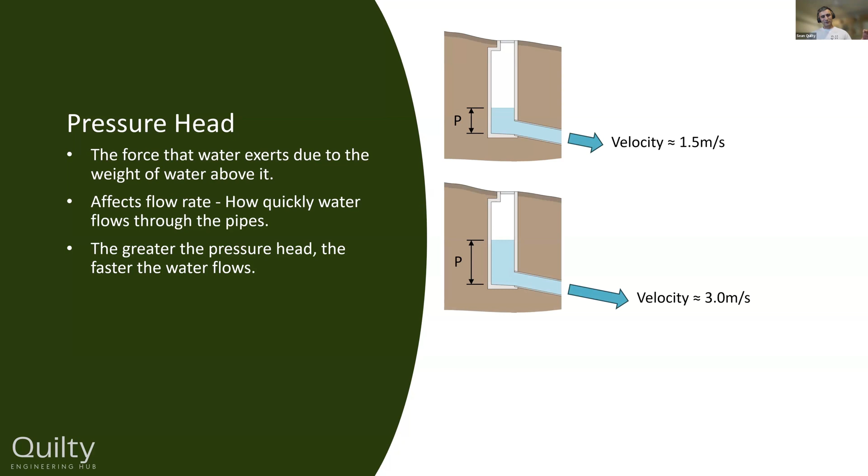As an example, if we have a small amount of pressure head in our system, we'll have a relatively low velocity. That column of water in your chamber is trying to force its way through because it's a free draining system. But if we increase our pressure head, and if our pipe is the same diameter and the same slope and nothing else changes, our velocity is going to increase as well. And again, if that column of water was to increase again, just the sheer weight of that water and gravity doing its thing will force that water out at a much higher velocity. That's important to understand, because when we start getting into pipe design, that pressure head is going to fluctuate through your system, and you can use that knowledge to create more efficient designs, or to understand where designs might fail or might succeed.

So this is where we look at hydraulic grade line, or HGL. The hydraulic grade line represents a pressure head in our pipeline. We looked at the pressure head just at the chamber, but that pressure will change and fluctuate throughout your whole system. So a hydraulic grade line basically shows a theoretical line where that pressure is actually building up to.

So the flow velocity is a function of our hydraulic grade line and not the pipe grade itself. This is where it comes into play, where we look at the pipe slope versus the friction slope. It's the friction slope that you'll see on your hydraulic grade line, and the friction slope is what will force that water through your system. So you might actually, in some cases, change your pipe design slope and nothing changes in your hydraulic grade line. That's because the friction slope is what governs how that pipe works.

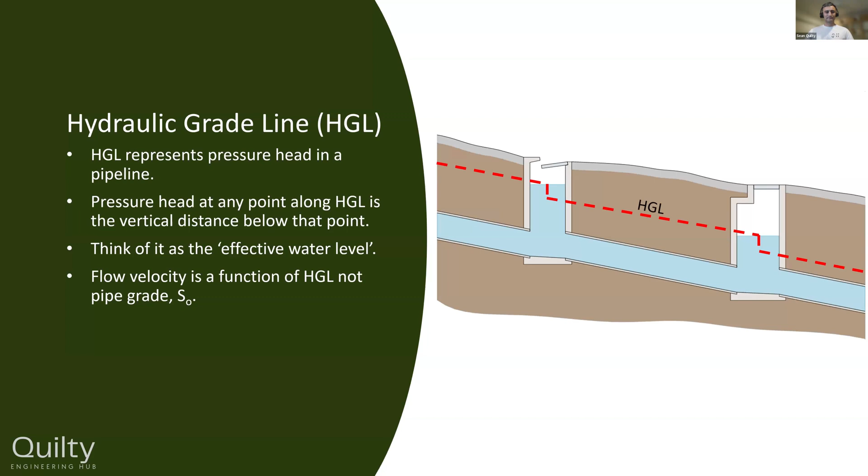So here in Australia, there's 3 different ways that we can model pipes, or we can design for pipes. These are 3 standard approaches, or 3 hydraulic design philosophies that we use. And this is all over Australia. In every state and territory, we have the same approach.

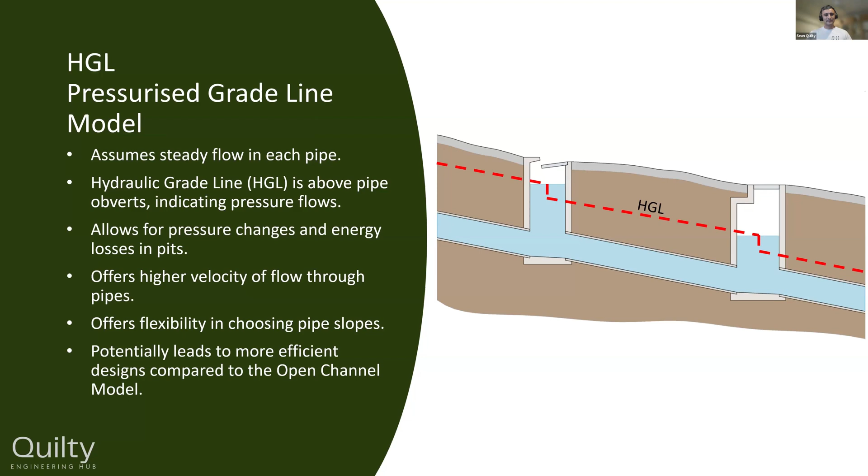And then in some cases, you might need to look at unsteady flow models. Now this one will be dependent on time. So unlike the steady flow models, where you're looking at a peak discharge rate at a specific point in time, this will actually analyze what happens at, say, 2 minutes, 3 minutes, 5 minutes, 8 minutes, and so on. So as the time progresses, your flows are going to fluctuate quite dramatically. A much more complex model, and definitely you will need computer software to run that, and it's only rarely needed in special circumstances.

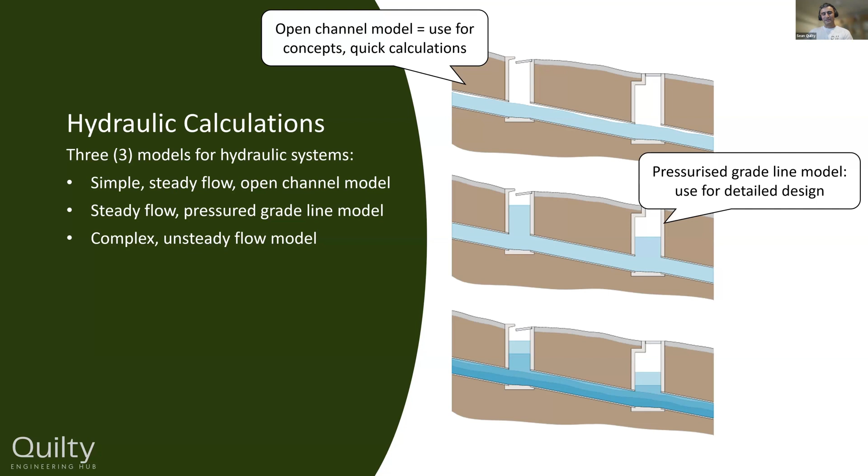So there are 3 models. The open channel model is used for concepts and quick calculations. The pressurized grade line model is used for detailed design. And then sometimes we'll use the unsteady flow model. This is typically when we need to look at real storms or a range of different storms, not just a peak discharge rate, or when volume needs to be considered as well.

So the next couple items I'm going to cover that will bring us close to finishing for tonight are just a couple things I've seen over my career that can really influence a design, and that are sometimes overlooked right up until the end. When you actually take these considerations into account, your design simply doesn't work, and that's an awful spot to be in - having to tell people their stormwater design doesn't work because they didn't check these things.

So this is where we get into tailwater conditions. Essentially this is starting our hydraulic grade line at the downstream or outlet level. We need to understand where that hydraulic grade line starts from. This is essential for any hydraulic grade line analysis, and it can really influence your design.

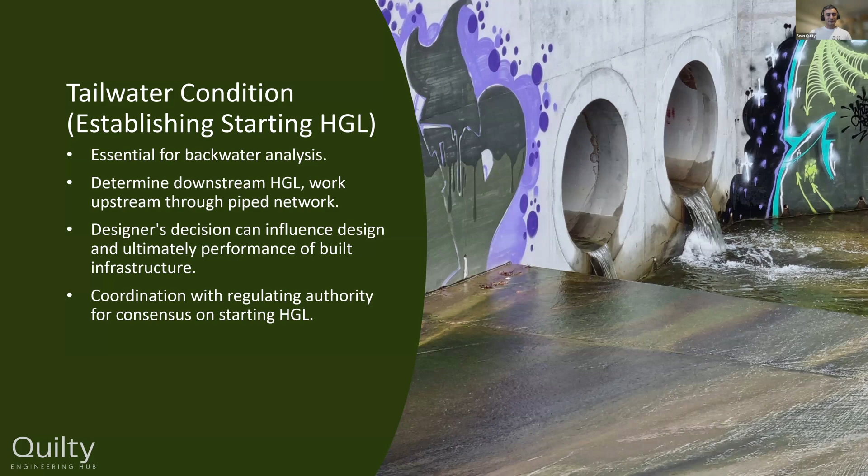As engineers and designers, we try to simplify something very complex, putting it into compartments, tables and forms. So we've got three different cases to look at. Imagine your pipe is discharging at an outlet - this looks at how we start the hydraulic grade line, which we call the tailwater level.

One scenario: you might be discharging into a lake with a standing water level, or a detention basin where the water will be at a certain level for a certain storm. We need to know where to start our hydraulic grade line for this pipe network. If the tailwater - the downstream standing water level - is above our pipe obvert level, then our starting hydraulic grade line is set to the tailwater level. That's where your HGL will start. I've seen cases in my career where people started at the obvert level as an arbitrary choice, but if you're discharging into a standing lake or detention basin, the tailwater might be starting much higher than your obvert level, which could ruin your design.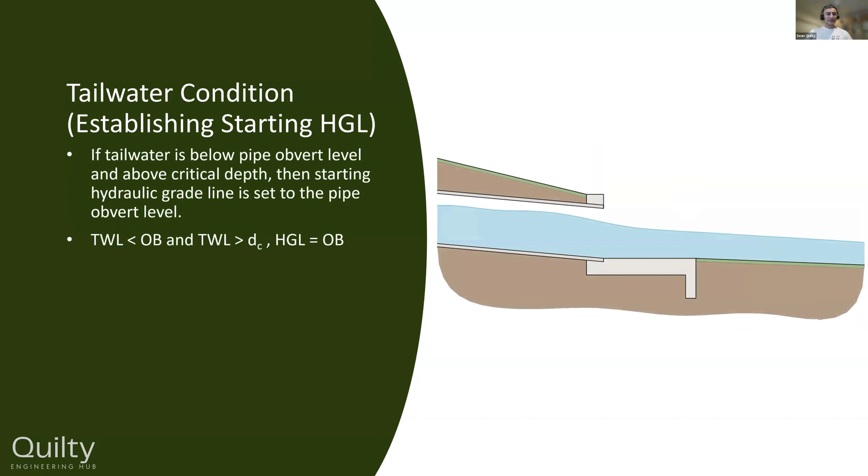We then have the case where our tailwater level is below our pipe obvert level, but above our critical depth at the outlet. If that happens, we set our hydraulic grade line to be at the obvert level - we simply take the obvert level in this case.

That's something to consider in any design - you must first assess your tailwater conditions for any stormwater pit and pipe design, whether it's discharging off the side of a hill, into a drain, into a detention basin, or into an existing pipe network. That's what we'll cover next.

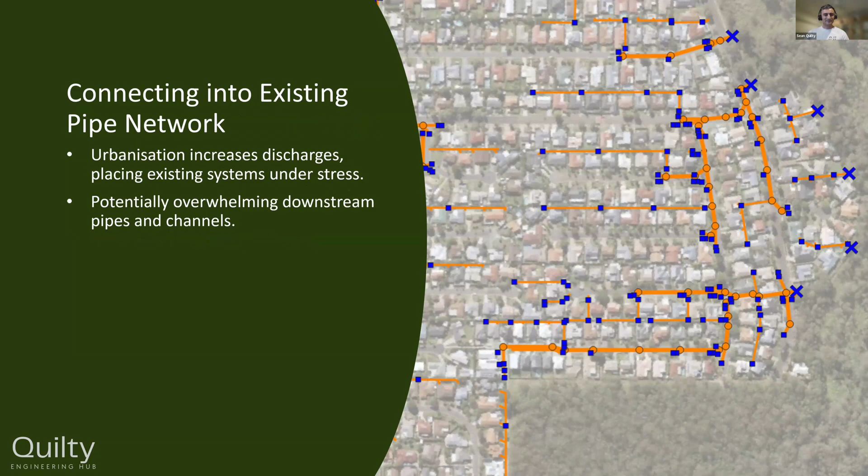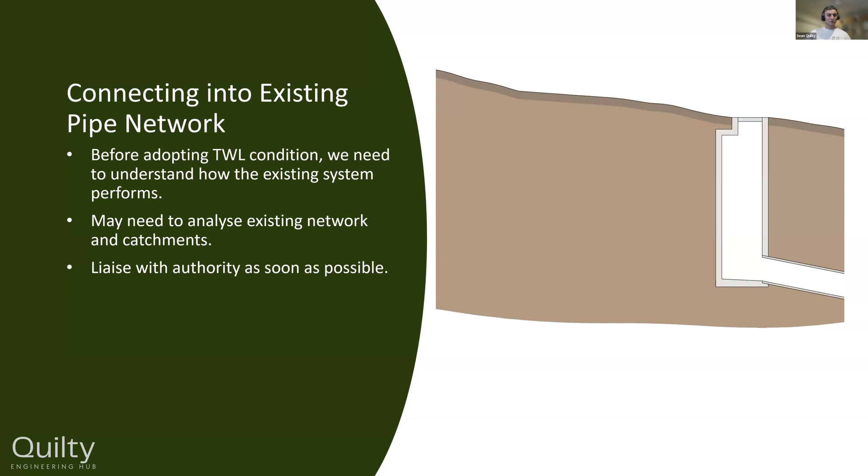Before we start our tailwater condition, or where that water level is going to start for our pipe design, we first must understand how the existing system is performing. Once we understand what's happening within that stormwater pit and pipe design, then we can adopt a tailwater level because we understand where those water levels would be in the existing scenario.

So this pit may have a minor event, keeping in mind stormwater pit and pipe design is for minor events. It may have a minor event hydraulic grade line that might look like this. So that's what the existing system is doing. Then we develop and connect in our proposed stormwater system. We're adding a bit more water, but that water doesn't really reach the surface. It performs underground as it should, so everything's okay.

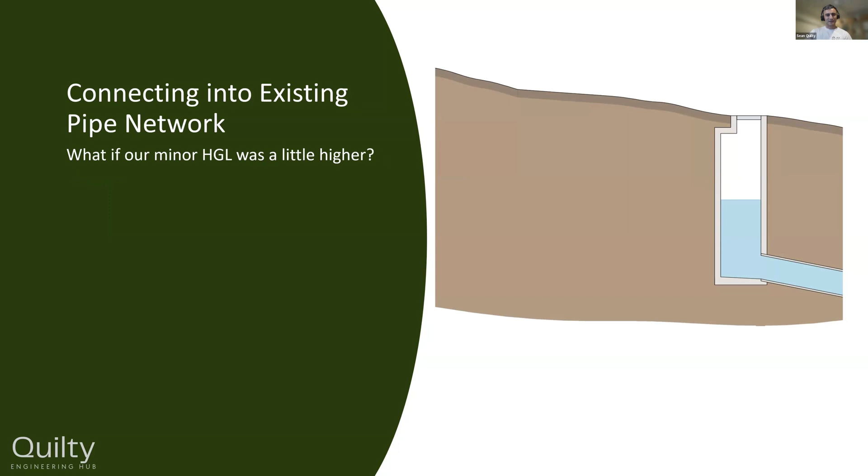But what happens if our existing system actually had a bit more stormwater running through there and those water levels were higher than previously? If we go and construct our pit pipe design and connect into this system, we can see those levels are going to rise because that downstream water column is higher. So it's going to cause a bit of an upstream effect for our design, and our water levels are going to increase.

But what if your existing system is already close to or at capacity? Especially in built-up areas, in larger CBD cities, this happens quite often. And if it's not thought about, it can be really detrimental on our design. Worse, if it goes unchecked and we build it, it can be detrimental for our community and our people as well, because it will cause flooding issues.

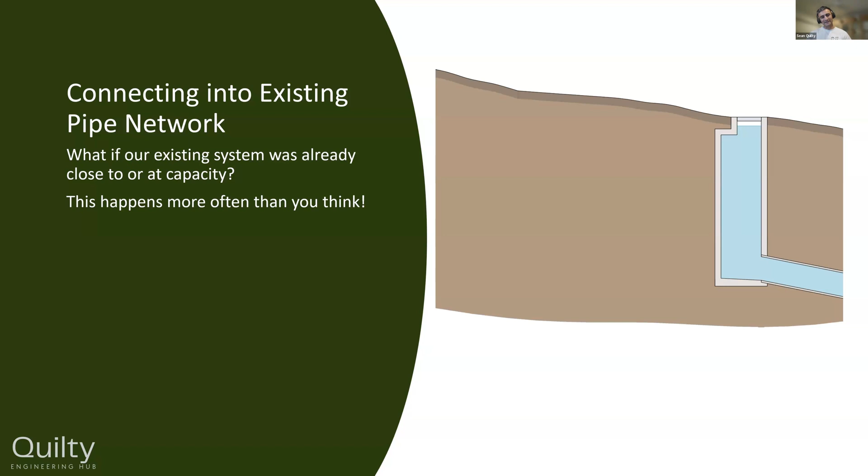So if your existing system is close to or at capacity, and then we try to connect our new system with more stormwater running through, what do you think is going to happen? Of course, we're going to force water where it can't go, so it will cause surcharge in our system and downstream as well. This happens quite often. I've seen this in a lot of stormwater reviews where that downstream system wasn't properly considered or analysed, and that's what was actually happening. Yet if you don't design for that, you might have a design that works on paper, but in reality this is what's going to happen, and you'll have surcharge and flooding issues.

So in Australia, as a national approach, what we do is we recommend that the starting hydraulic grade line, or your tailwater level, should be 150 millimeters below the surface level. Now, the problem with this approach is that it is very conservative to start, but your existing system might be at capacity, and so that would be true, or your existing system might have more capacity, and so you might be over-engineering a solution.

So my recommendation is that you talk with the authority, the municipality, or the council that owns the stormwater system, because they are in the best position to understand and give you advice on how that existing system is actually functioning. When you go through that conversation, then maybe you can do some analysis to work out what that level might be, or council might advise you and say, we know that's a problem area and flooding occurs, so maybe a connection into that system is not a feasible option, or maybe you need to upgrade that existing system downstream.

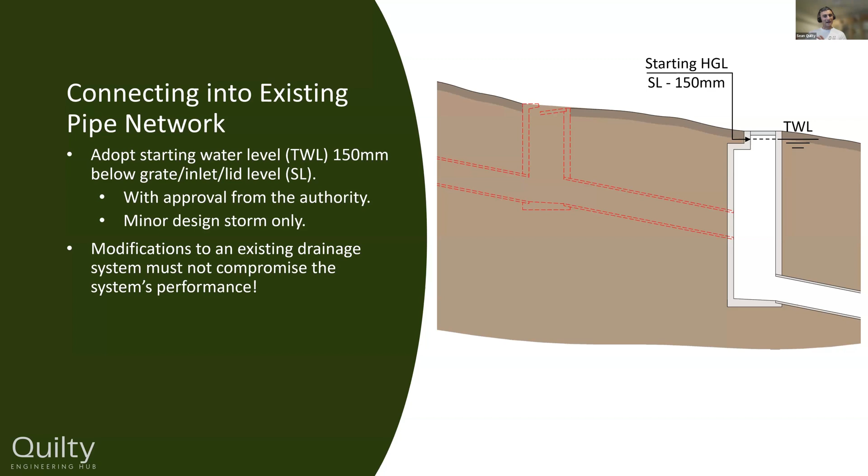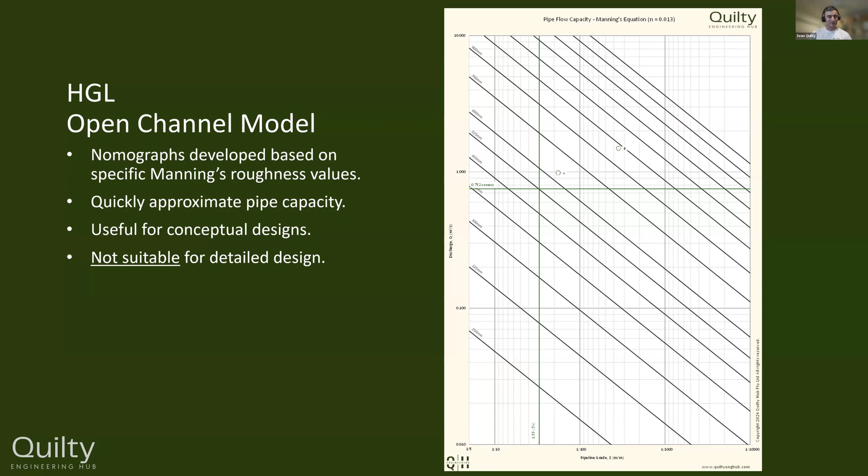This design spreadsheet is included in our pipe design online course. The spreadsheet and the chart you see is completely dynamic as well, so as you enter your different values, you'll get different readings on that chart, instantly giving you those answers.

So for that nomograph, I'll give you another example here and show you just how to read this nomograph. I think that will probably wrap things up for the night, and then I'll pass you back to James.

So if you have one of these design charts and we have a problem, let's say we need to pipe 100 litres a second, but we're limited to a maximum of 1 in 50, or 2% grade. We come to the chart and look at our 100 litres per second, that's what we need to discharge.

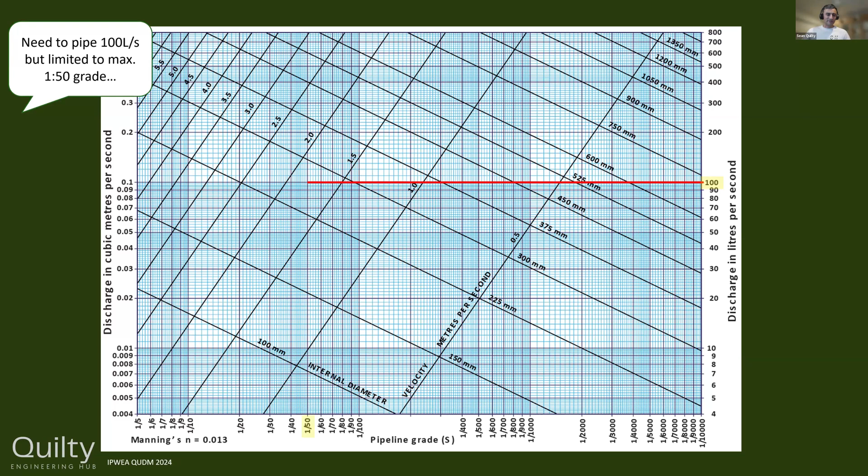We read across, then look at our pipe grade at 1 in 50 and read up. Where these two points intersect, in this case it's positioned between 225 and 300 millimeter diameter pipes. A 225 diameter is slightly too small to convey the 100 litres a second, and a 300 mil diameter pipe will be able to convey slightly more than that. So we adopt the 300 millimeter pipe for that initial pipe reach.

So you can see using these design charts, it becomes very quick and easy. Once you understand your inlet inflow, you can then work out what that pipe needs to be to convey that inflow through your system.

So that's where we read across and see in between those two pipes, and you take the greater of those two to make sure it has conveyance.

We can also check the velocity on some of these design charts as well. The other diagonal lines that we see on this chart are between 1.5 and 2 meters a second, giving you an estimate of what that velocity might be as well.

We can reverse engineer this as well. So rather than have a discharge that we need, we can use this chart in a different way to check the capacity of any given pipe diameter at any given grade. As an example, if we want to know the maximum flow rate we can get through a 450 millimeter diameter pipe at a 1% grade, we can read the 450 profile.

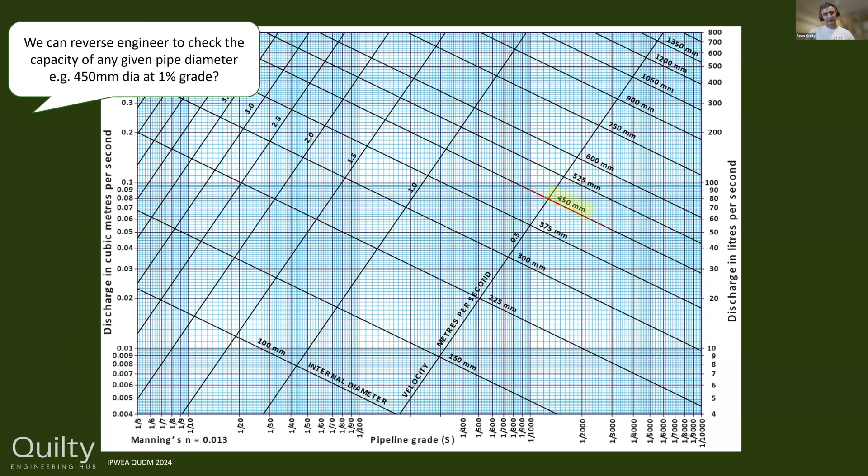We look at our grade at 1%, and where they intersect, we can read across and find out what that discharge rate is for that particular pipe at that grade. So in this case, a 450 diameter pipe at 1% grade will discharge 285 litres per second. That's how we can use those design charts to do a very quick analysis for pipe design.